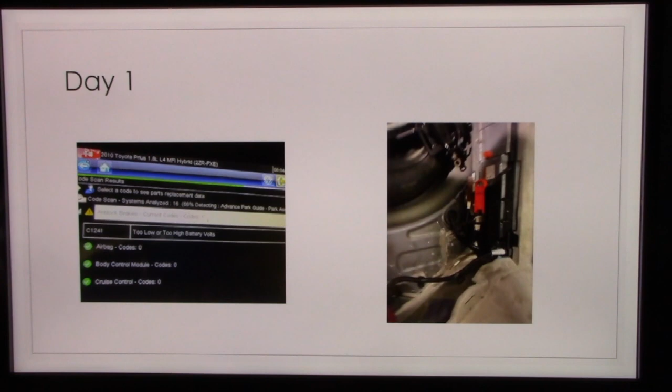My whole purpose on this was just to document my findings. I even took pictures that it has two different style rims on the vehicle, which I don't have an answer for why that could possibly be. Again, 360,000 miles, served the customer well for all that time.

Day 2, after documenting my findings, I called Paul and he said, yeah, go ahead, don't worry about the high voltage codes right now, just proceed onward with the build project, because it's a pretty monumental task here to cut this vehicle up and make it into a professional looking training and trade show prop for us to use at different venues. So Paul said go ahead and do it, we'll worry about the high voltage codes afterwards.

Our goal was to have one side of the vehicle cut, and also have the roof off, so that when we're doing a live training class, we could have a group of guys around it and everybody could see it. Everybody would understand exactly what we're doing. There's not going to be any restricted sights, so to speak.

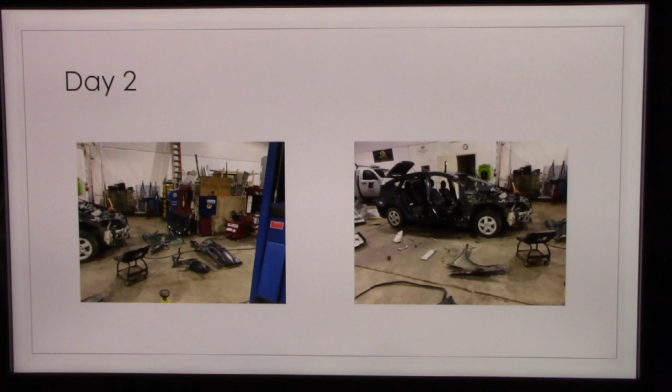So I started unbolting the fenders, the doors, took the windshield out, all that kind of stuff, the rear tailgate assembly. As you can see, as we went through here, pulled it up in the shop and just started going to town, taking stuff apart on it.

A couple other little pictures as the progress proceeded here. And like I said before in some of my previous YouTube videos, I'm kind of a neat freak, and I got to tell you that during the process of this build, it pretty much destroyed my shop. But I went ahead and cleaned it all up at this point, so not that big of a deal anymore.

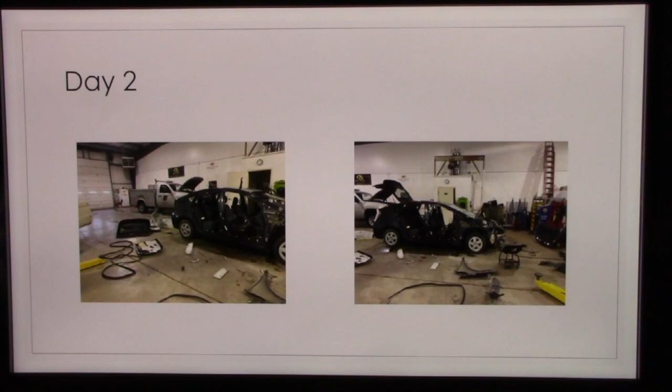What I started to do is, as I took the parts off, I wanted to save them. My goal was, for a little bit later on in the build, I wanted to install some similar style dead products—a dead inverter, a dead battery pack—and I figured maybe I could do some horse trading online with some of these body parts for a junkyard or salvage yard, whatever you want to call it, to try to work out a deal to get some of these other components.

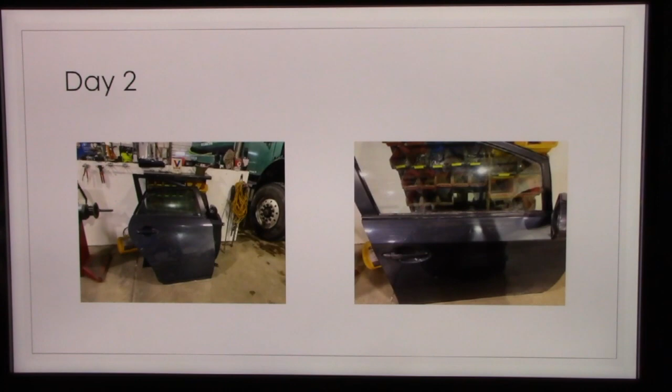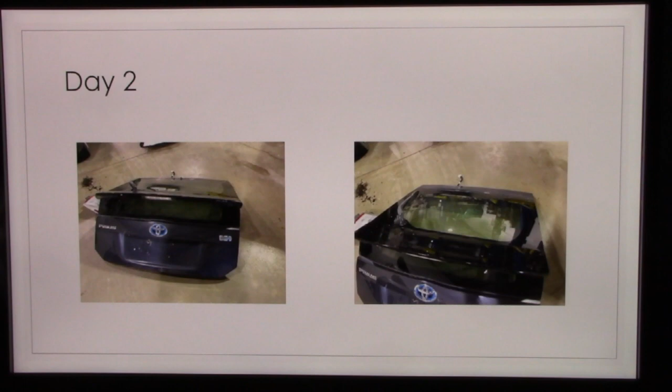We can see a headlight on the ground there. The tail light on the passenger side we actually reused—we had to cut it, but we ended up reusing that. So as you can see, I started doing my cuts here.

So I cut the B pillar out of the vehicle, and this was all still day 2 of the build. And as I started taking the headliner out and a lot of the other components, the interior and stuff, you could see the wiring nightmare started to come to fruition, so to speak.

Remember, we don't want to have any kind of warning lights on. We still want this vehicle to be just like you want to get in it and drive it across the country. So I was going to have to contend with all that wiring harness and stuff at some point in the future, but right now I was primarily concerned about making all the cuts.

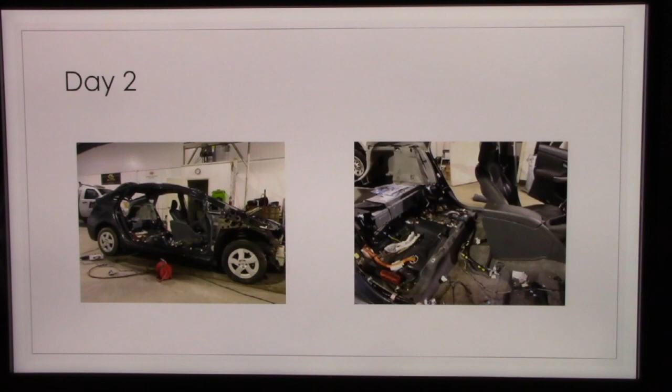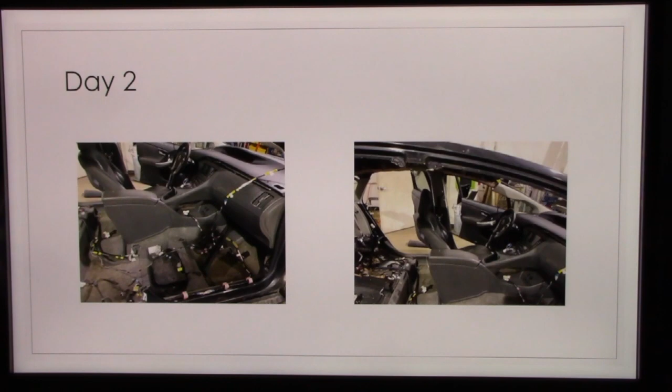So the B pillar, the doors, the fender, the tailgate assembly, the interior—all that stuff has been removed at this point. And obviously, when you make these cuts, there's going to be quite a few sharp edges, so we're going to have to contend with all that. We don't want anybody cutting themselves severely or anything, so we're going to have to make some caps and do a whole lot of body and paint work on this vehicle as well.

So you can see there's the back view. You can kind of see the high voltage battery pack is still connected, or installed in the vehicle, I should say.

I went ahead and removed the high voltage disconnect plug and also disconnected the 12-volt battery, waiting the appropriate amount of time, and did the test at the inverter to make sure all the capacitors were discharged before I started doing any of the cuts. Remember, with a high voltage system, you always want to practice safe operations here. You don't want to run the risk of getting any kind of electrocution or anything along those lines.

Once I went ahead and disconnected all that stuff, it pretty much stayed disconnected until the vehicle's build was all done. I didn't reconnect it again until I had to start fixing those high voltage codes.

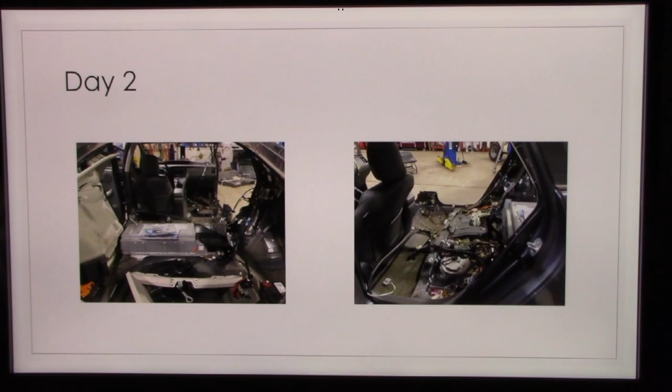So you could kind of see the progress as we went through more of the wiring harness and stuff. We also cut the front half of the bumper cover off and took the wheel wells out. The reason why we did that is, this is a Generation 3 Prius, and it's got an electric AC compressor, so we're going to be using that in the training classes we do. We want to have access to all of this stuff.

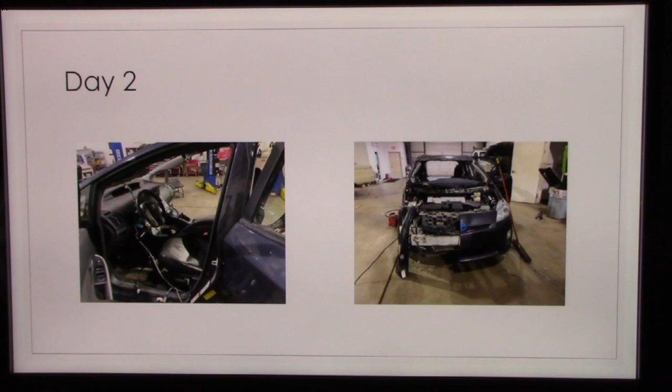So this is the theory behind the cuts that we actually made here. There's a lot of wiring that we're going to have to take care of. I had a whole bunch of different ideas on how to do that, and I'll talk more about it as the presentation goes along. But again, we don't want this to have any kind of trouble codes or warning lights or anything along those lines when it's 100% done.

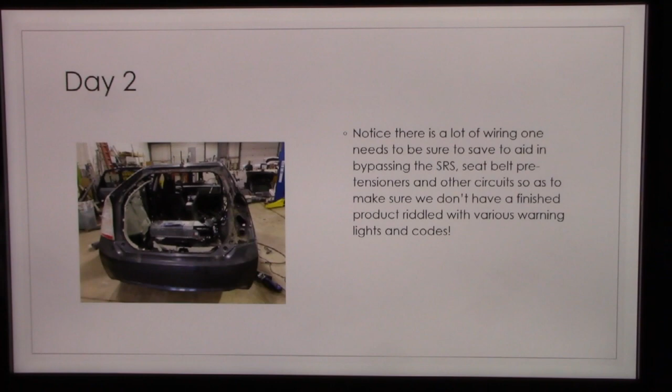So this pretty much is the end of day 2, and it doesn't look like a whole lot of work was done, but I got to tell you, it was a full day's worth of work. I came down on a Saturday. I'm an early bird, I started about 5 o'clock in the morning, and I ended up going home that day about 4 o'clock in the evening after all those cuts and all the disassembly and everything along those lines.

Day 3, I came back and I said, okay, well now I'm going to cut the A-pillar and cut the roof off the vehicle. We had to support the roof, so obviously the whole passenger side, all the supports are cut at this point.

And then once I went to the driver's side to do the cuts, the roof would want to just fall in on you. You have to be both inside and outside the vehicle to make some of these cuts, because there's some supports on the bottom side of the roof. So common sense takes over, and you try to cut all the ones on the inside while there's still a little bit of stability left, and then you do just the outside cut, which is a little bit more safe.

But I still went ahead and propped up some 2x4s as we started doing the cuts there. You can see how the 2x4s were cut and wedged in place while we were making some of these cuts.

After the cut was made and the roof was kind of just dangling there, I'm a one-man shop, so I pretty much had to just wait for somebody to walk through the door to help me go ahead and remove the roof from the vehicle. So it was a parts driver that came to deliver some parts for some vehicles, and I said, hey, give me a hand, put these gloves on, grab the lighter side of the roof, and let's go ahead and take it off and put it off to the side so we could get the cut off.

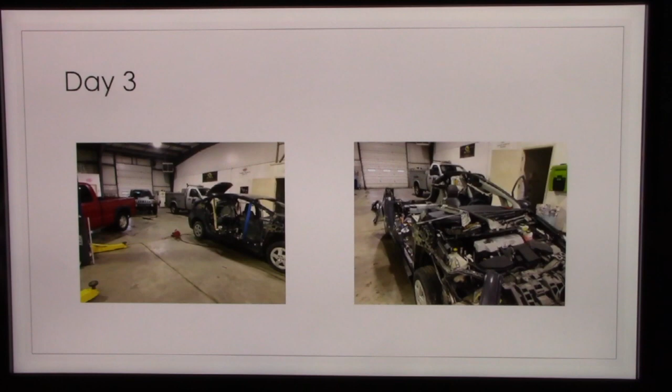So now you can kind of see what the vehicle looked like, and you can start to formulate an opinion on how this whole thing is going to be used in training classes at this point. But the roof has now been removed, all the cuts have been done. Only thing I have to do at this point is start doing some body and paint work on it to smooth out all those cuts, and then start the actual build project for the training purposes of the vehicle.

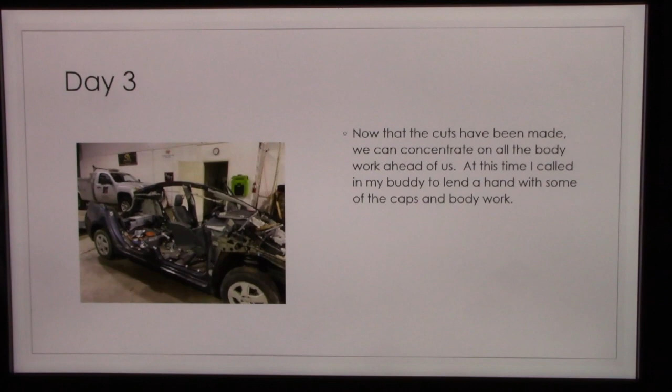So here's another side view of all the cuts that were made. Lots of sharp edges on it at this point. Can't tell you how many band-aids I went through during this process, but it's starting to come to fruition. And now we're going to day 4.

On day 4, even though I've done a little body and paint work over my career, it's been several years, and we have a timeline to meet. So I called up a good buddy of mine who does a lot of body and paint work. He has his own shop not too far away, his name is Jimmy Douglas. I've known him for years, actually grew up with the kid, he's older than me. I called him out and asked him to come give me a hand, and we both started attacking some of these caps we had to make.

So I got some other pictures here. There's a picture of the VIN tag for the paint code. But the high cut on the passenger quarter, I got to tell you, Jimmy knocked this out of the park. He said this one's got to be really nice because this is the high cut, this is the one everyone's going to see. So we went ahead, and every one of these caps we made is supported really well, you can actually stand on any one of them.

Before the caps were put on, we welded in 1-inch bar stock so they had a nice big brace to it. We kind of joked about it and said we're going to use the sheet metal out of the roof, so this way it's still a numbers matching car. So we went ahead and cut up the roof to use all the sheet metal from it to make these caps. We had to make several trips to Home Depot to buy all kinds of bracketry and bar stock, but the actual sheet metal caps were all made from the actual roof of the vehicle.

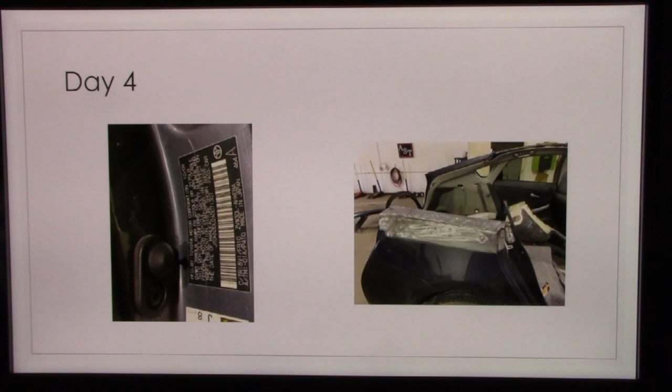So he started on this and formed this thing pretty nice. Like I said, we've got it all braced up and everything. You can see the quality of his craftsmanship here, it forms pretty much right into the body line, so very little mud work would have to be done on it.

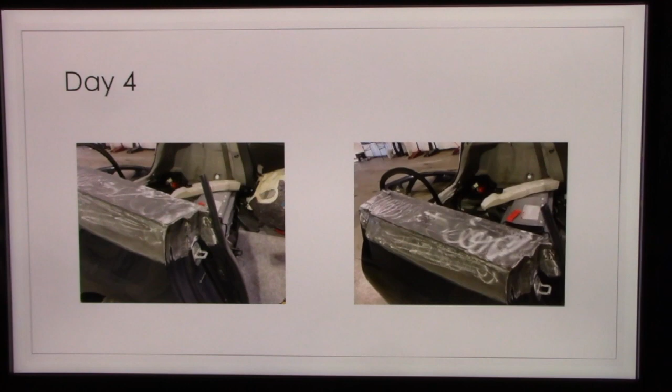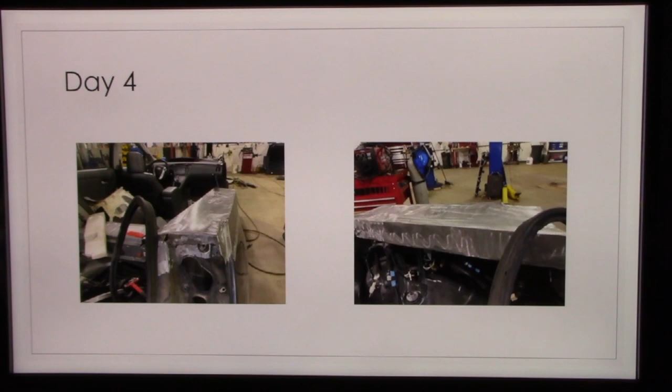As the day went on, we decided the back part of this thing would be really cool if we cut the taillight and reinstalled that. So we cut the taillight on the passenger side and reinstalled it, but at that point you got to make a cap for the top of the taillight. I went ahead and made a cap, and Jimmy Douglas said this is no good, we're going to do something really cool here, we're just going to feather the body work right into it. So it kind of looks like a million dollars at this point. He really has a good eye and a lot of talent to make these vehicles turn out pretty nice looking when they're all done.

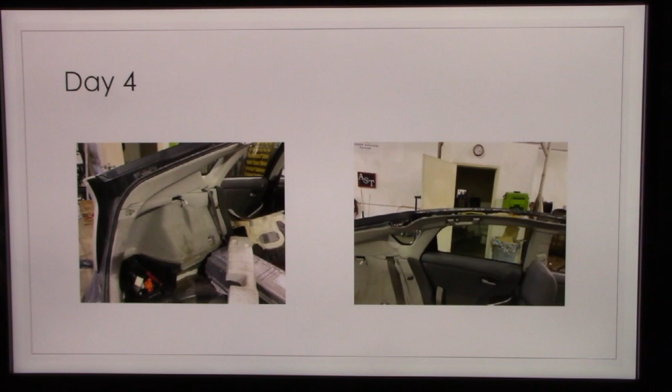So here's just some more pictures. We still got to make a cap for the other side of the vehicle on the high roof line on the driver's side. But you can see the airbags and everything are still all connected inside this vehicle. At this point, after we did the first cap, I decided since Jimmy Douglas isn't going to stay 12 hours a day, I'll go ahead and start contending with the wiring here and there just to keep forward progress going on this build project.

Again, the driver's side cut, if I had to do it all over again, I would probably make that about 8 or 10 inches wider than I did. The only reason I used this format was I looked at a couple of these vehicles online, and they were all cut pretty close to the side. If I had a lot more room left on the roof area, I could have just bent that down and saved us a lot of time making a cap for that side. But at this point, it is what it is, we had to make the cap, so that was one of the last things we actually did.

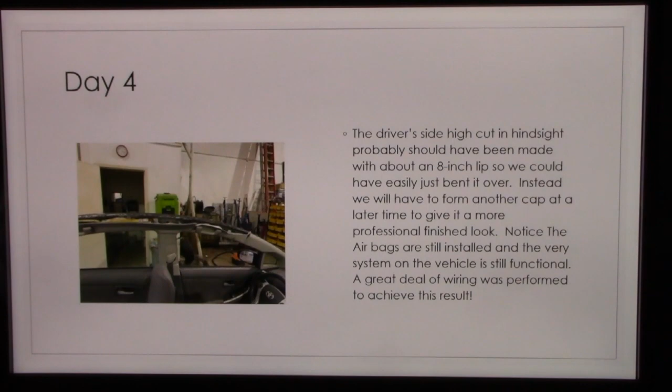Day 5, we cut the passenger taillight, and once again Jimmy went ahead and molded it right into the rear quarter patch. It's a pretty cool look. It took the majority of the day to actually do that, but there's my buddy Jim there.

You can see how the taillight is now installed in the vehicle, and with the mud work and everything we did, we fiberglassed it right into place there, and then we just put a light coating of Bondo on top of it to go ahead and finish it.

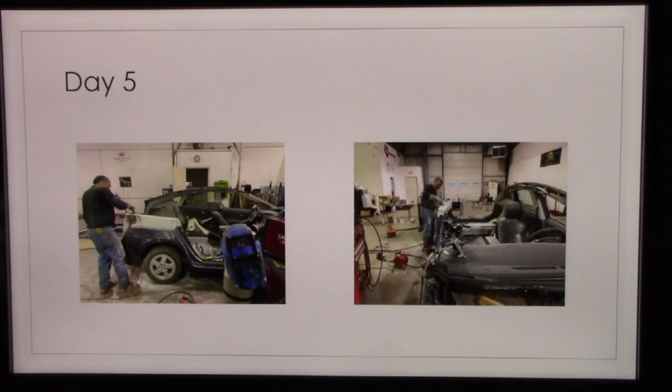While he was doing that, we were going ahead and also making the caps for the B pillar and the A pillar, welding them in place, starting to put some light mud work along those areas to start the body work process as well.

As you can see, this totally just took over the whole production of the shop because of the time frame. It can be done in a couple weeks, maybe even faster depending on your skill level, but this was definitely a huge build in a small amount of time.

Day 6, another day of metal fab work to make plates for various cuts that we've done. I welded together a spare frame, thinking that if I'm going to be using this in training classes, I want to be able to have it user-friendly, so to speak.

So I had another high voltage battery pack, and I thought it'd be really cool if I welded a frame together, put it on some pull-out hinges, and mounted it in the trunk area so you can actually pull the battery out. That one's dead, 100% safe—everybody can touch it, feel it, do whatever, and be able to see it. So while Jimmy was doing some of his talented mud work, I was going ahead and starting the metal fab process on the battery pack and some of the other areas I wanted to include there.

So you can kind of see here's the spare dead battery pack—I've already got it mounted on the hinges and stuff. This thing just folds right in and out of the trunk area, 100% safe for everybody to touch.

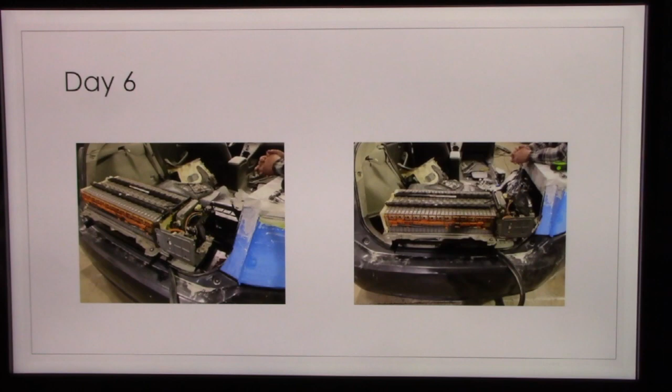My thought process was, when we go ahead and do this type of training, I'm going to have people do the various tests and everything, pretending like these dead components are live. Once I observe them doing the process correctly, then we'll take the covers off the real stuff on the vehicle and do it the exact same way to get valid results. It's just one more safety step when dealing with high voltage electronics on one of these vehicles, to make sure everybody's 100% safe while they're doing the actual testing procedures we're going to cover in the training classes.

So here you can see we've got the battery pack done, and we also have that quarter patch done. You can kind of see how the whole thing is feathered in here, starting to look pretty nice.

You'll notice that all the wiring at this point has also been taken care of. I went ahead and did whatever I had to do, and all the airbags and seatbelt pretensioners and everything are still connected in this vehicle. I made sure there wasn't going to be any kind of warning lights or anything along those lines.

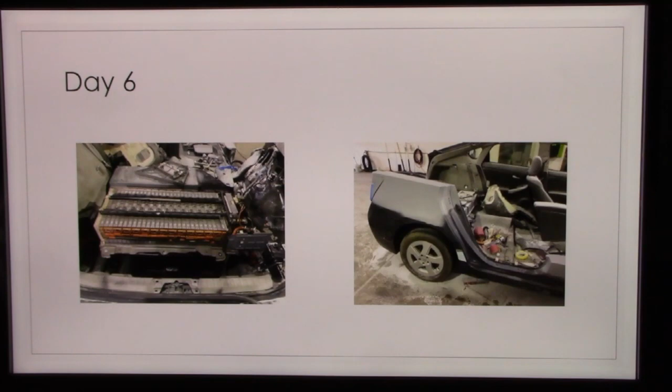So you can kind of see the B pillar cut down at the bottom there, the patch that I made for that, and also the finished body work on it—the A pillar cut, same scenario. We had to cut the metal out of the roof to actually make the patches. For any of the large patches, we didn't want the sheet metal to flex or anything, so I've got that all braced up and welded together, so it's got a lot of strength to it.

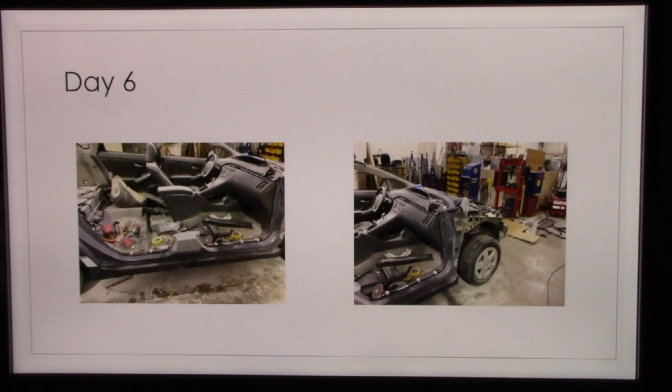Here we have day 6 coming about. Our goal today was to go ahead and put it in primer and do a little bit of sanding on it. If we had to do any more small mud work for low spots or anything, we went ahead and did that, but we wanted to put it in finished primer and get it ready to start painting at this point.

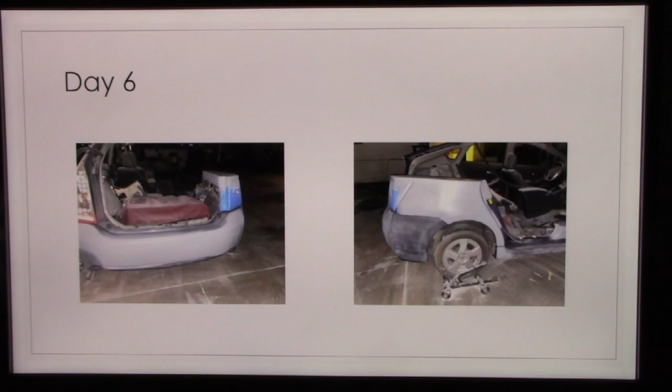Notice that when you have a hybrid vehicle, as you guys are aware, especially on Toyota Priuses, you can't really push these vehicles, especially since I've got all the electronics disconnected on it. So I went ahead and used my little rolling car jacks there—makes it real easy to move a vehicle around the shop, especially with just one person. So here's the end of day 6.

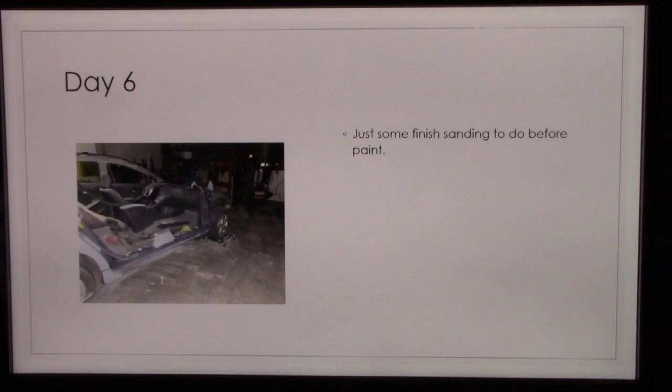Just a little bit of fine finish sanding and then go over with a tack rag and stuff before we can start putting the paint and the clear coat on.

So the main goal on day 7 was to get it in paint. The wheel jacks, like I said, made it real easy to move it around the shop, sweep up all the dust, so we didn't get a whole lot of dirt in the paint job when we actually sprayed the paint on it. We also wet down the floor and everything to try to keep that dust from circulating up in the air.

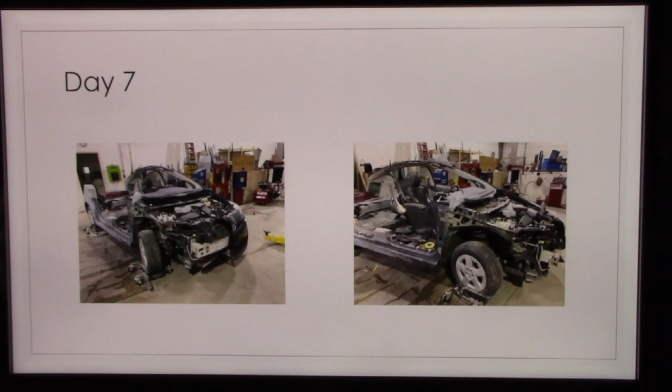So as you can see, we're getting it ready to push into our little makeshift spray booth area, which is pretty much right in front of the big overhead garage door with some fans and stuff. So we've got it all up on the car jacks, and all the finish sanding and finish work has been done on it at this point.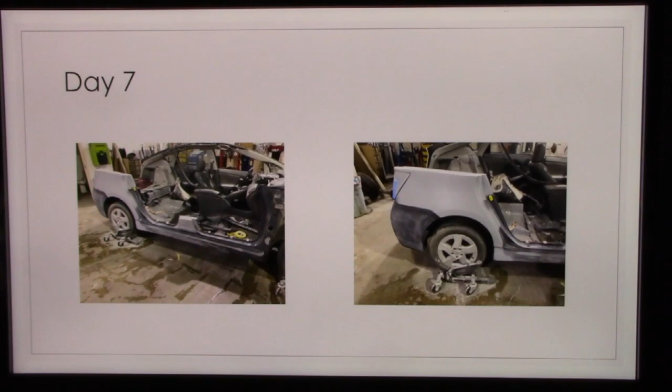As we keep going here on day 7, we've now got it wet down the floor, put it right in front of the garage door, and we're starting to put the base coat on.

So the base coat flowed out really nice, no dirt in the base coat whatsoever when we did this project, which was really surprising because this isn't a body shop, it's just an auto repair shop. But it flowed out really nice. I started to get a little bit excited that hey, I'm starting to see the light at the end of the tunnel. This car actually might meet the deadline of the 2-week time frame.

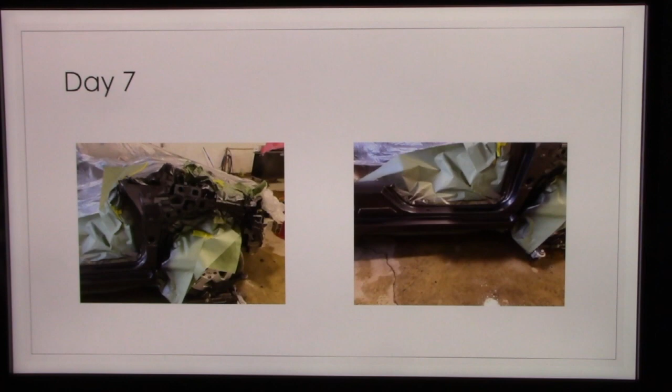So here we got just some more pictures of the base coat, different areas, the different cut areas and stuff that we did on it.

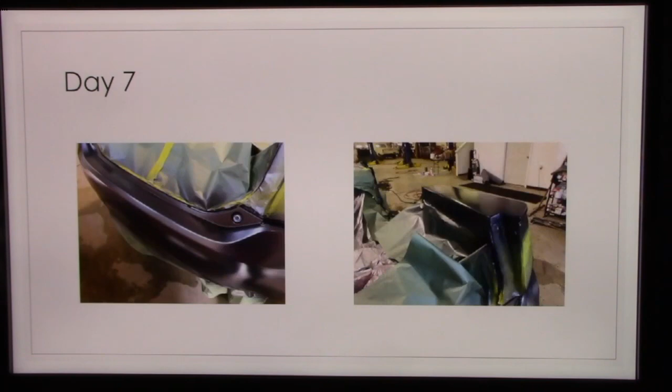And then we applied the clear coat to it, and now we started to get a little bit of a shine on the actual body parts here. This vehicle had 360,000 miles and a lot of different little scrapes and dents and stuff, so we tried to take care of the majority of that.

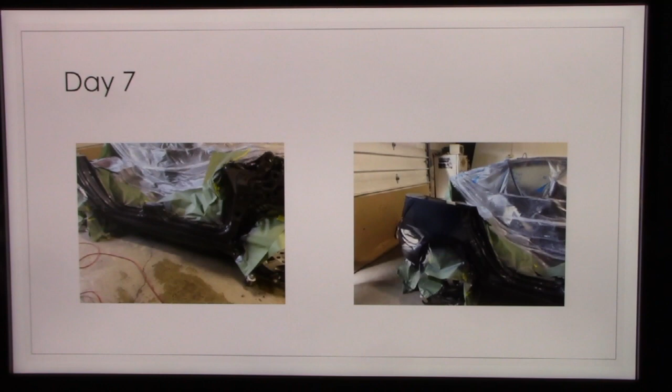It is going to get wrapped with some sponsors, logos and stuff, but we still wanted it to look like a halfway decent car as we were going through all the working areas that we did here. So we even painted the rear bumper cover, stuff along those lines, just so everything flowed a lot better.

Day 8 was another full day of fabrication for me. At this point, Jimmy worked his magic. The car looked like $1 million - it was cut up, but it looked like $1 million. You couldn't even tell that it was cut at this point.

So at this point I decided, okay, I got to secure another inverter and another motor generator, and obviously the TV and the Toyota TechStream scan tool and all that stuff. And I just started fabricating the build process of the training props that we're putting on the vehicle.

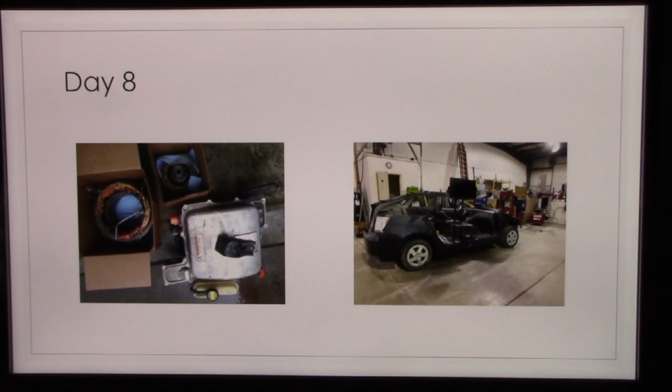At this point I felt pretty confident we were going to meet the deadline because I was just in my fabrication mode at this point. So as we continued on here, as the paint started to cure and everything started to get a little bit safer to work around without having to worry about scratching up all the fresh paint, we just kept going with the build process here.

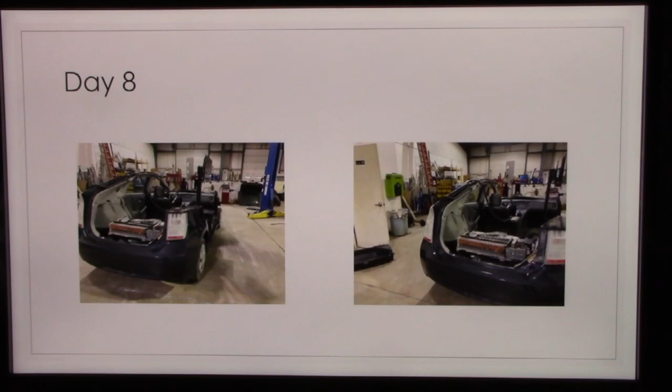So you can kind of see how the TV stand, obviously it doesn't roll around anymore - I got that securely bolted to the passenger floor area. Give you a couple different views of how it looked from the passenger side as opposed to the driver's side.

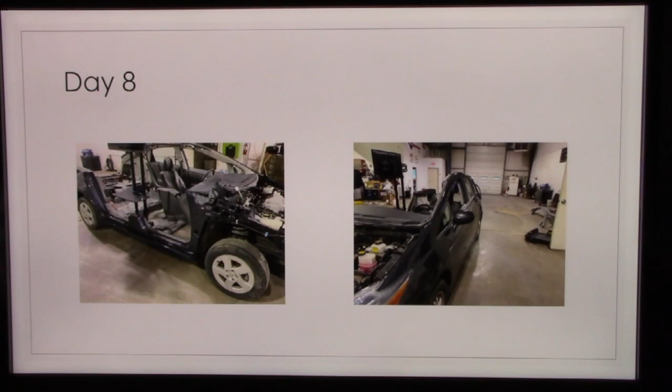At this point, Jimmy's working on making the cap on the driver's side roof area, and I'm just continuing on with the fab process. You can see in the picture on the left that I've got the base for the swinging tree where I'm going to mount the actual stator assembly, so that this thing swings in and out of the vehicle, making it easier to transport across the country.

Also, when we're using it for a training class, we swing that out, we can talk about it, we can do whatever we want with it, and then we can swing it back in place and not have to worry that it's in our way or anything along those lines.

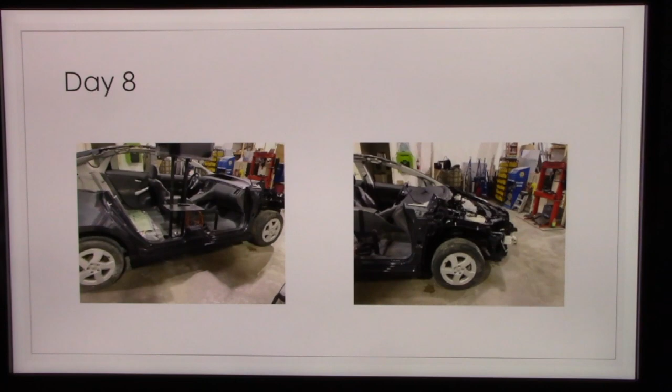So basically, that was just a big steel pipe that I got mounted to the actual frame on the vehicle here, so it's nice and secure.

You can kind of see I've got the OBD2 extension cable all neatly secured to the dash area, so when you're driving the vehicle, you don't have to worry about the cable hitting your leg or anything. It's just an extension cable, so eventually there's a Tech 2, a Tech Stream scan tool, that's installed on that shelf, and it just plugs in right there.

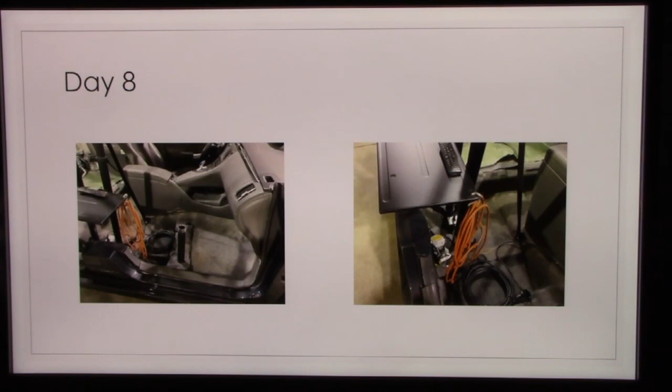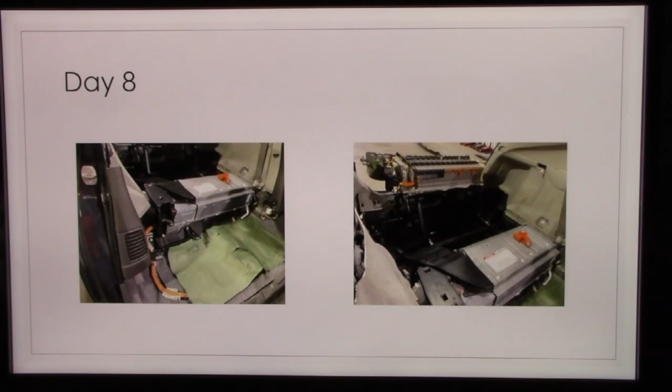Here's another view of the battery pack. Again, we still have all the live components on the car as well as the actual dead components for training purposes here. You can see here I even installed that little antenna.

I took it off the roof. I wanted everything to work on this vehicle, so the vehicle's navigation system, the radio, all that stuff still works. I just relocated the antenna off the roof, put it right over by the A-pillar area there.

Day 9, I mounted the extra stator windings up to the tree. You can kind of see how I finished that little swivel tree. I've got it so it sticks out, plus it actually swivels back in.

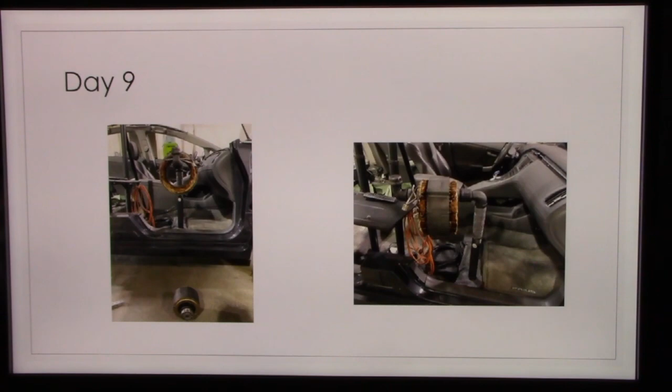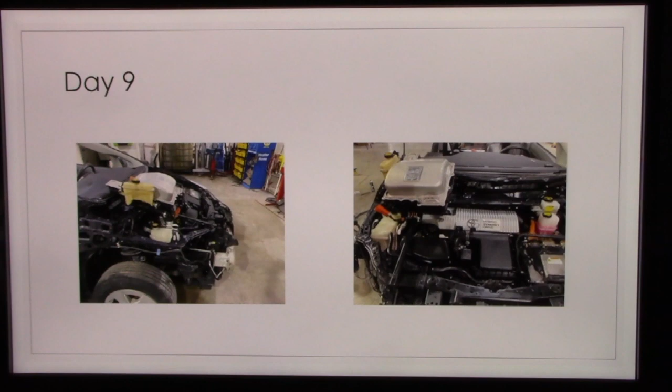Started to mount the actual inverter, the spare inverter, underneath the hood area. This way you can take the cover off, you can look at the capacitors, you can talk about how to do the testing to see if the actual system's dead or not. You can go through all the training related stuff safely on the dead component first, and then go over to the live component once everybody's ready here.

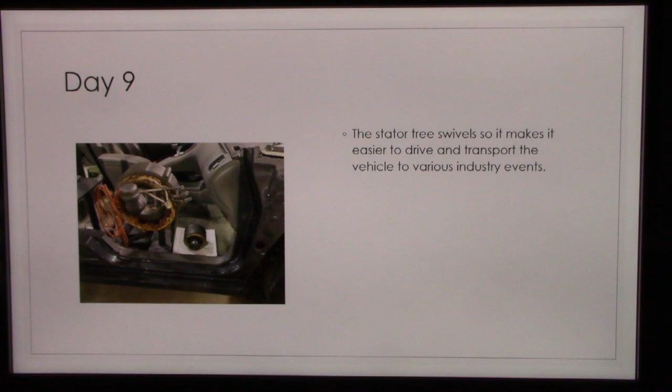Everything's not done yet, but you can kind of see how I've got the stator windings just resting on the swivel pipe tree set up right now.

Day 10 was spent labeling all the high voltage components on the vehicle. I wanted to pay as close attention to detail as possible, and I figured this is going to be great in a training atmosphere where we can go through and talk about whether it's a cooling vent for the high voltage battery pack, or high voltage wiring, or whatever the case happens to be. I spent a lot of time labeling the stuff that's kind of important.

I put a little makeshift plastic cover over the live inverter. The main purpose for that, you can't really get hurt from that unless you start taking the covers apart and stuff, but the main purpose was more so at trade shows. Sometimes somebody might be screwing around at a trade show, even though it'd be next to impossible—they'd have to remove the 10mm bolts and stuff to get those connectors off—but it's just kind of a little check and balance there.

I secured the stator windings to that pipe there, so you don't have to worry about it at a trade show, somebody taking that off the pipe and dropping it, because it's got a lot of weight to it, dropping it on their toes or anything along those lines. You can see how I started labeling the different components here.

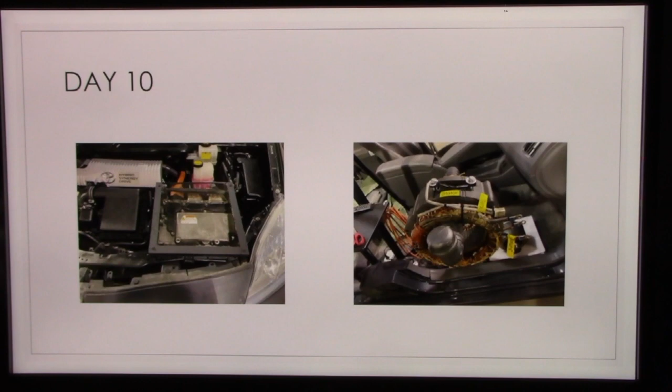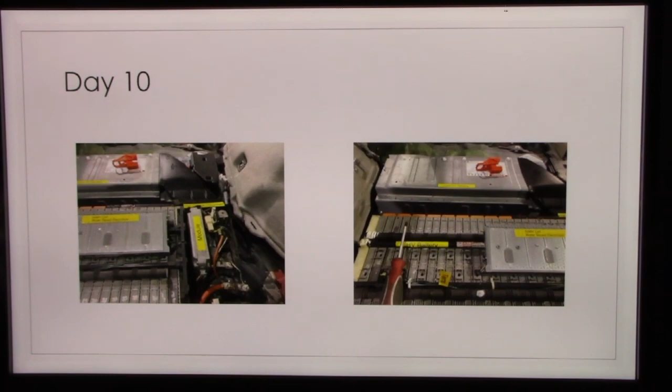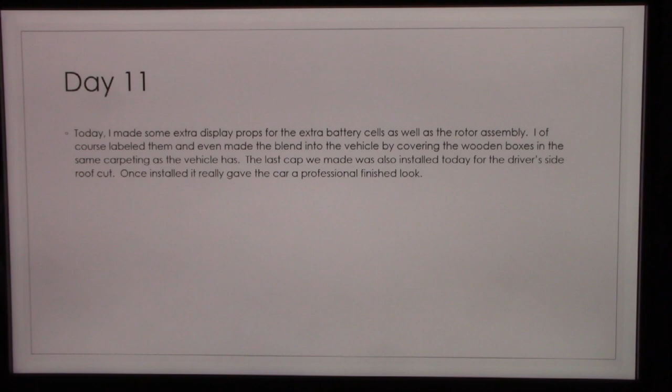Day 11, I made some extra display boxes for the rotor assembly from the motor generator, and also had a good buddy of mine graciously give me some spare battery individual cells. So I'm gonna put all this stuff in this vehicle, make it all on display. It'd be great for training purposes—you can hold the individual cells in your hand, everything along those lines.

I also made some little signage, not planning on using the signs in the least bit in training or the actual videos. Those are more so for when the car's on display at a trade show. Somebody could walk over if they're not really sure what an inverter does or anything, and it gives them some bullet points, background information on whatever components they happen to be looking at the time there.

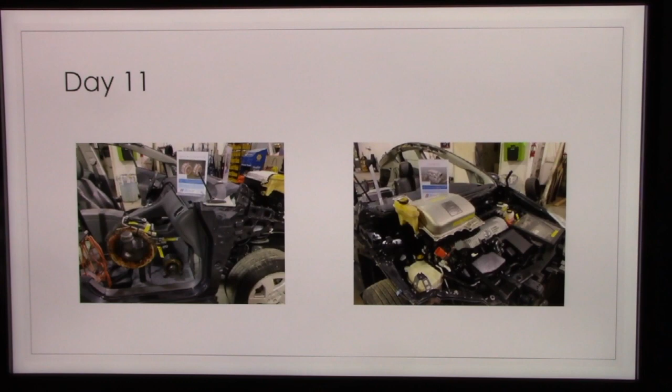So that was the theory behind that part of it. You can kind of see on the passenger floorboard now how I've got the motor generator's rotor section securely mounted to the little display board. I even wrapped the boards in the same color carpeting that the vehicle has, so it kind of blends in, looks nice.

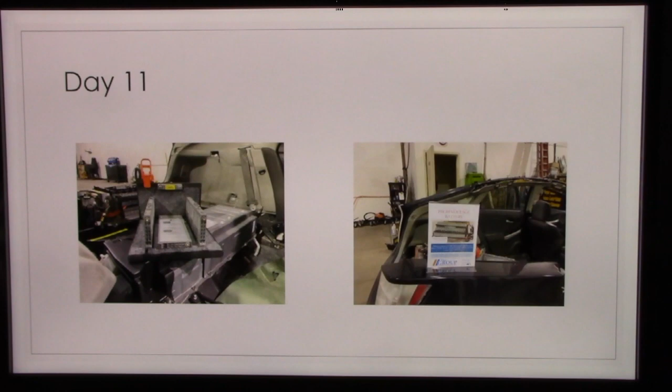Here's my battery individual cell training board that I have on display as well. Again, you can kind of see how I wrapped the boards in the carpeting.

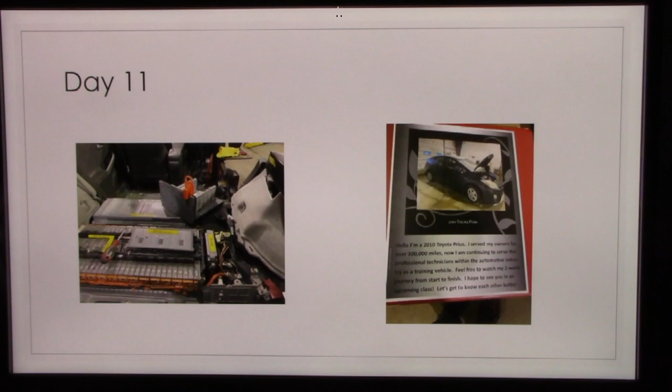I also put together a little 3-ring binder of the various pictures, from day 1 all the way through to day 13, the 2-week process of how this vehicle took shape. This is more so for a trade show, so if somebody's walking around and has interest in it, they could see the progress as it went through.

And now we have the actual cap on the driver's side as well, so you can see we no longer have any exposed sharp edges whatsoever. The vehicle is 100% safe to work around. People can touch any part of it, don't have to worry about getting electrocuted, don't have to worry about getting any kind of cuts or anything along those lines. Again, that was 100% Jimmy Douglas's talent there that made that cap.

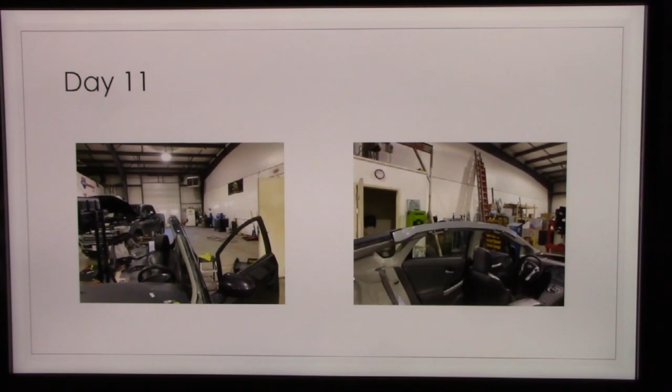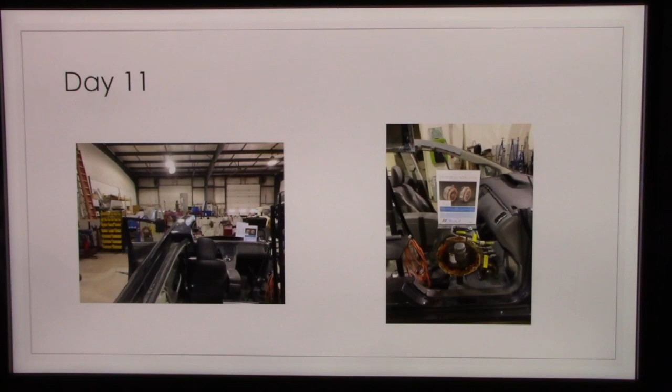You can kind of see how I repositioned some of the signs here, and the vehicle's starting to take shape. This is day 11, there's only 2 days left, not a whole lot more to do on this vehicle. Here you can see how we got access to the AC compressor, so we can talk about that in the training classes and do the stuff we want to do on that as well.

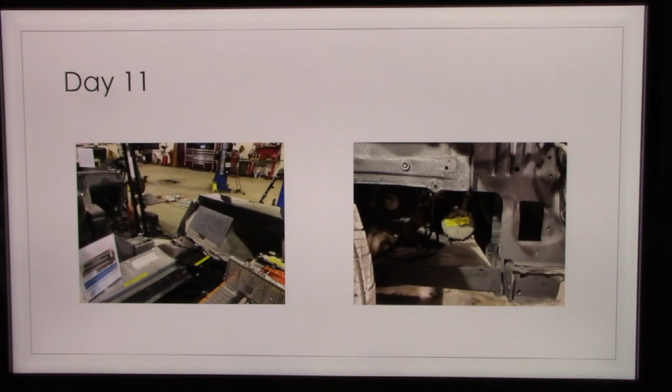And I'm just showing different views from all sides of the car with the props that we have put in there.

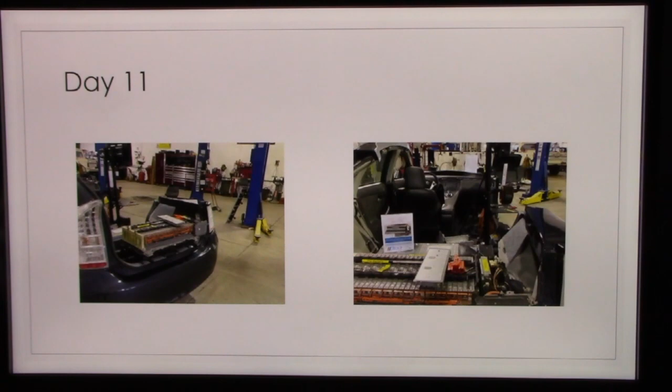Then on day 12 I came and said I really didn't like how the battery pack individual cell box was just sitting on top of the high voltage battery still mounted to the vehicle. So I went ahead and made another pipe assembly that I was able to mount up higher so that it's more in the line of vision, and you could take the individual cells off and hold them in their hands. They can do whatever they want to do with them at this point.

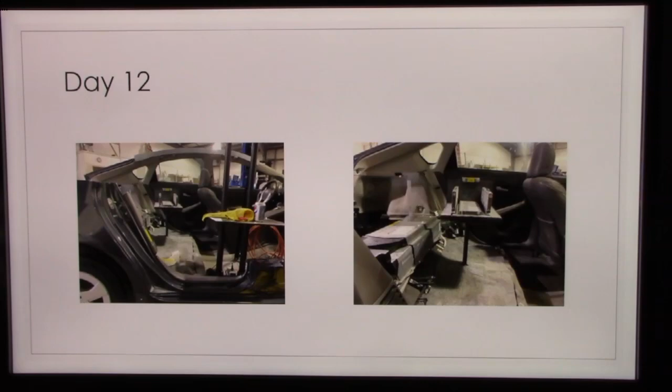Day 12, this was the final day, and the last step I had to do is install the Toyota TechStream scan tool, hook it up to the TV, wire everything up with all the cabling and all that kind of stuff. So now the Toyota TechStream scan tool is 100% operational.

This way, when we use it in the training classes, we can show exactly the various data stream PIDs and any codes or that kind of stuff that we wanted to see. We tell them, hey, this is what the Toyota scan tool has to offer - you can use your individual Snap-ons or OTCs or whatever and see how much you can do with those aftermarket scan tools. So at this point, the vehicle is pretty much done.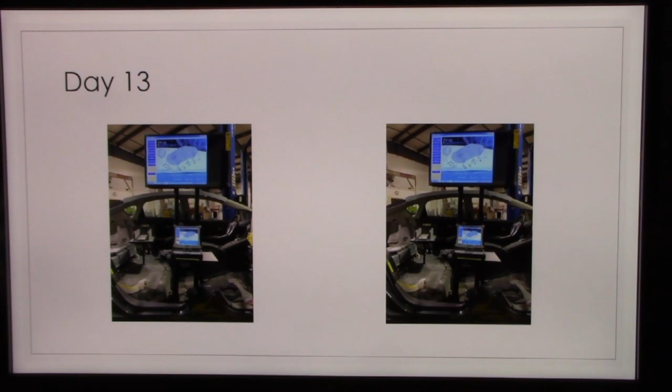I have a couple more slides here that will show you the projected look after the vehicle is 100% wrapped with the logos and stuff. So there's the projected look of what it's going to look like.

It's going to be sponsored by the Group Training Academy, which is a conglomeration of Pronto Auto Parts, Federated Auto Parts, AVI, and different sponsors in the industry here. So that's the projected look. It won't be wrapped until after the Vision Show - it's going to get wrapped when it goes back to Fort Myers, Florida, which is where AVI is from.

So all in all, the conclusion - this was actually a pretty exciting build for me. It's something that most people can't say they've ever done, you know, take a car, cut it up, and turn it into a training project. But this is something that, as an instructor, I was able to build 100% the way how I liked it. And I got to thank Paul Lowers for allowing me to do that - he gave me free reign over the build process here. He just wanted it to fit all the needs he had for it, which was the trade show tell-and-show type of stuff, the video shoots, and also the live hands-on training classes that we plan to do with it.

So overall, it was a pretty exciting build for me. What I'm going to do now is take the camera and give you a walk around view of the actual live vehicle here. The video quality is going to get a little shaky since I'll be holding the camera, but I'll try to narrate a couple of things as we go through. Let me go get the camera from the tripod area.

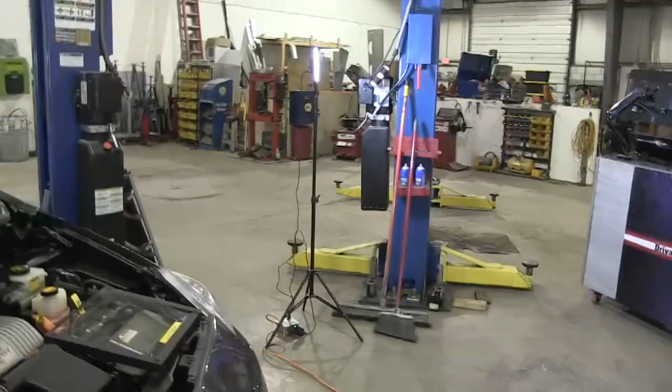Here we'll take a look at it from the front area. You can see the video lights and everything set up. Here's the front area of the vehicle. I'll do some close-up walking and explain as we go.

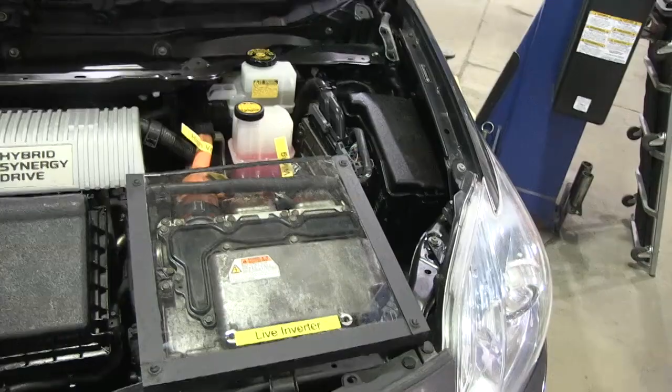There's the little plastic cover over the live inverter, but here's the dead inverter. This cover will come off. We'll talk about everything they need to do inside here, like checking to make sure once they remove the service plug that the capacitors are discharged, and it's safe to take the high voltage linesman gloves off to actually do work without all the personal protection devices.

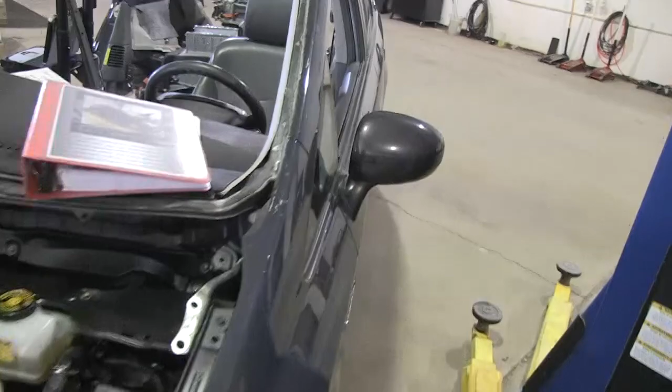So we'll just keep walking as we go through. Here we've got the actual little 3-ring binder with the picture progress book.

Here's a view from the overall driver's side. As you can tell, not a whole lot of work was done on this side, with the exception of the top cap area that we made so that when the vehicle gets wrapped, it's nice and smooth.

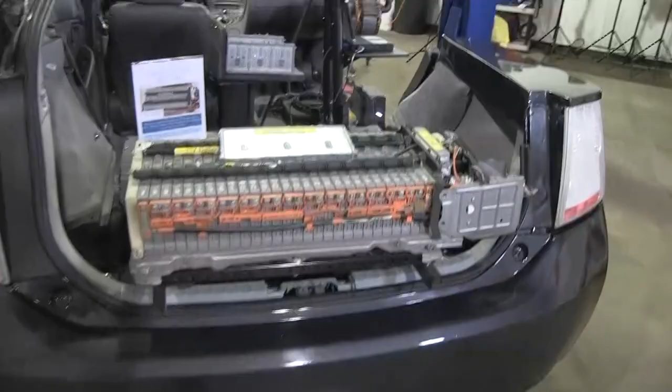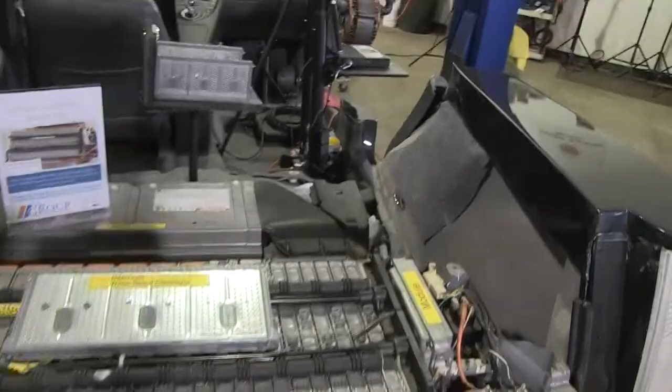A view from the back part of the vehicle. There's the folding high voltage battery pack. Again, this is 100% dead, I can touch whatever I want on it, no worry about getting shocked. I have an individual cell here that's all labeled that people can hold in their hands and do whatever they want with. We talk a lot about it in the training classes.

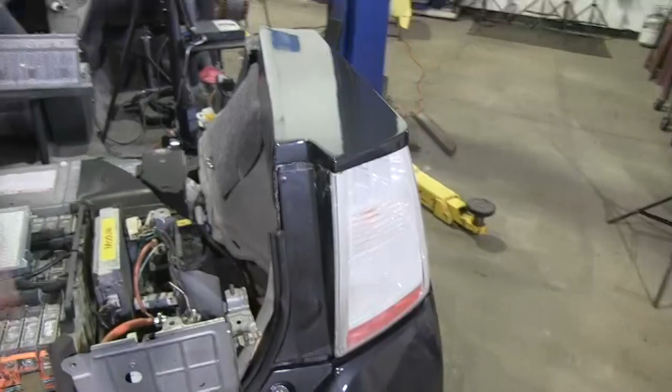I've got everything labeled here, so you can see the temperature sensor for the battery pack, the battery pack module, all that kind of stuff. Everything is highlighted and labeled.

There's the high voltage disconnect plug on a Toyota Prius, if you've never seen that before. So again, the theory is: do the tests and everything, explain how the system works, do the tests on the dead components, and then once they pass doing that correctly, we'll go into the training class and take off the covers of the live components and do the exact same tests again.

Here we can see how we feathered in that tail light on this side. Pretty nice job, I think.

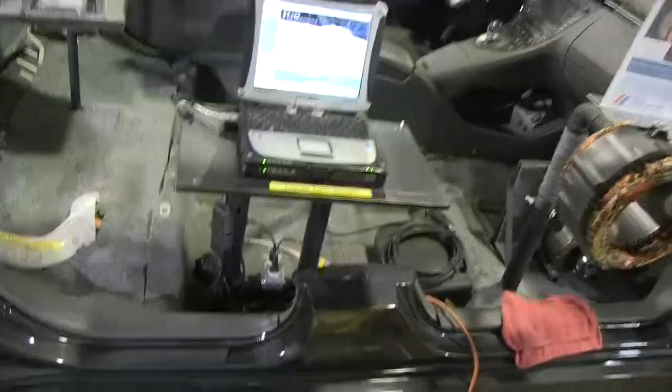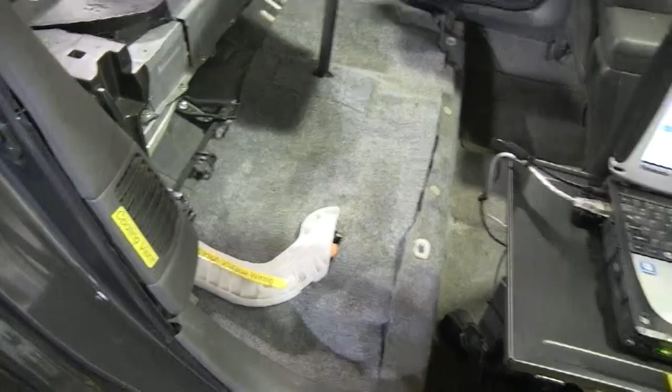Coming over to the actual meat of the whole build here. Here's the little cell stand that I made for the spare cells, again with the labeling everywhere it needs to be. There's the Toyota TechStream scan tool hooked up with the big monitor, so when there's a group of guys, everybody can gather around and see everything 100%.

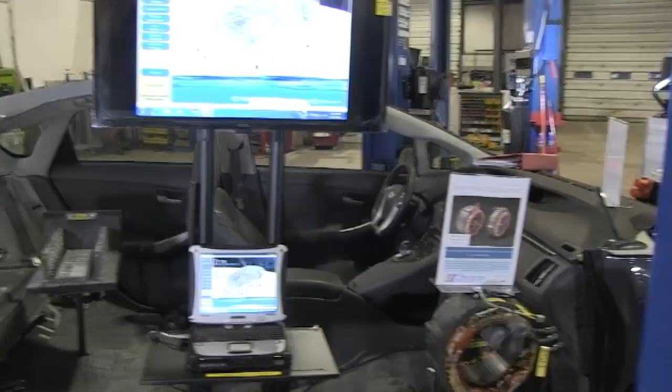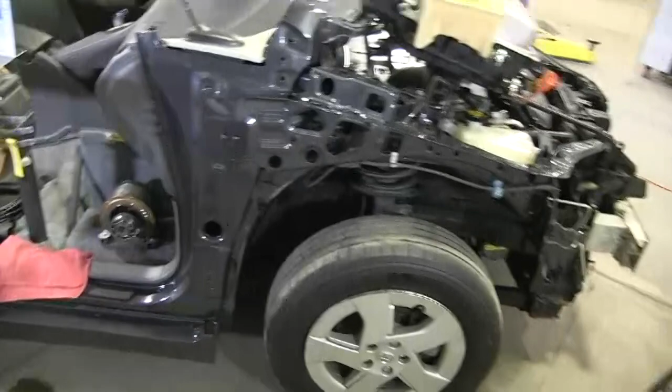There's the stator windings with the swivel tree. Again, we've got the OBD2 extension cables, the 110 outlet, everything put together to make it as easy to use in training as possible. There's the rotor assembly from the motor generator.

All this stuff has a lot of weight to it, so this is something you definitely want to make sure you have secured properly, so nobody can get hurt just from clumsiness, so to speak.

So overall, like I said, this was a pretty exciting build for me. Never done something like this before. And I'm looking forward, if we get to do one for an electric vehicle, to doing that as well. This is something that if you have any interest in obtaining training on hybrids or electric vehicles, definitely look up the AVI's website.